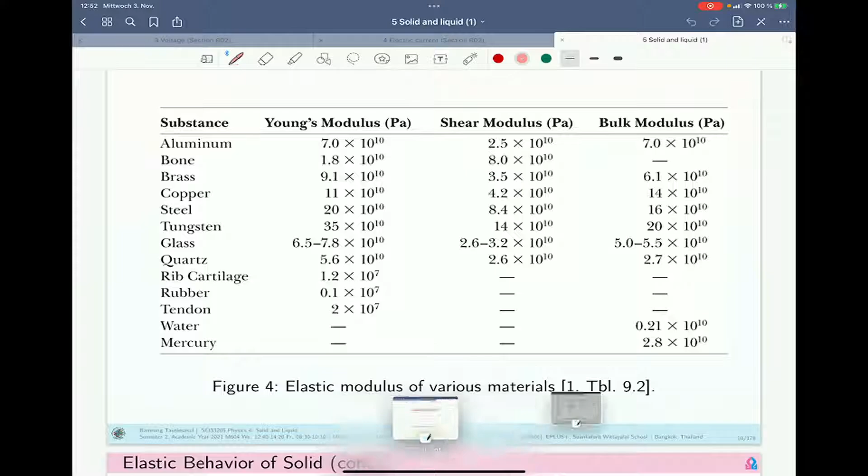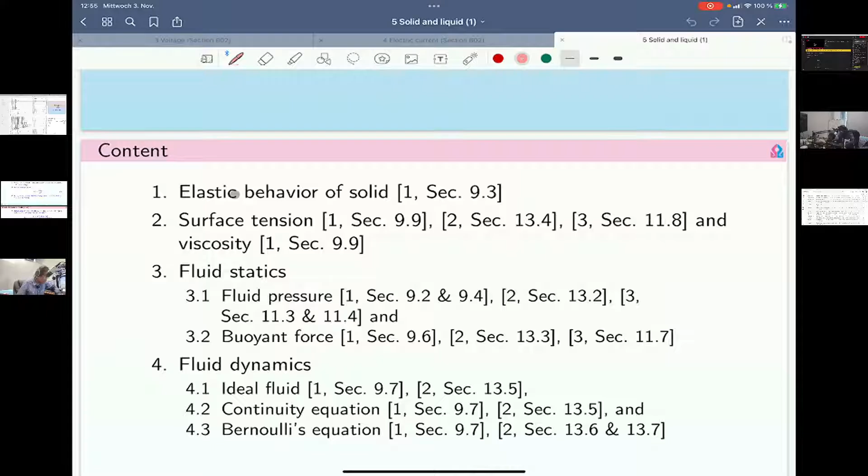The content in this chapter is as follows. First, we will talk about the single title that we are going to cover about solid, that chapter is about solid and liquid, right?

I didn't tell you that in this semester we will have a lot of things to see. The 5th chapter is solid and liquid, and in the 6th chapter it is atomic physics, right?

Atomic physics. And the 7th chapter is nuclear physics and particle physics. Okay, the particle physics is quite new, I didn't hear about that during my age in high school or secondary school. So the first chapter this semester is solid and fluids.

The section that we are going to consider for solid is only this one, the first section, it's elastic behavior of solid. So we will talk about stress and strain in several aspects, for example in the longitudinal aspect, so we will talk about the length of that object, the length of the solid material.

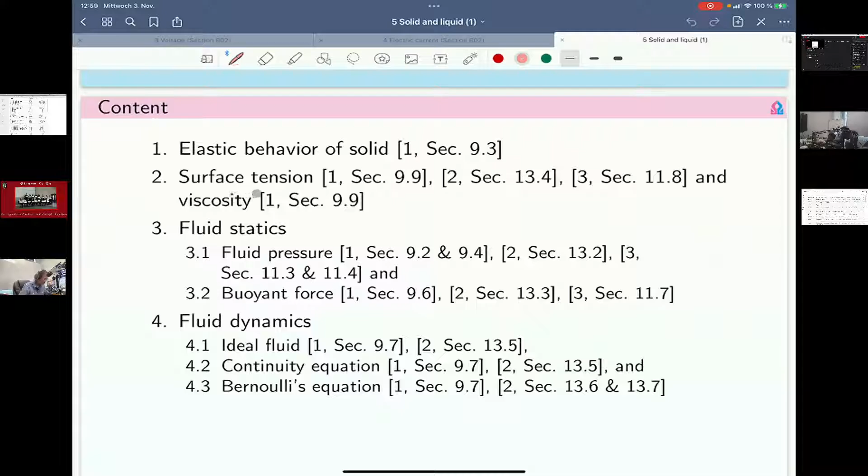In the second section, we will talk about the surface tension of the liquid, and viscosity too. Viscosity is mainly related to the behavior of oil and so on that is used in the automotive industry.

In this section, the last section will be movement of the fluid, and we will introduce this section with ideal fluid, the continuity equation, and Bernoulli's equation. This one is more general, and that's the whole thing in this chapter.

Let's start with the first topic, the first section: elastic behavior of solid.

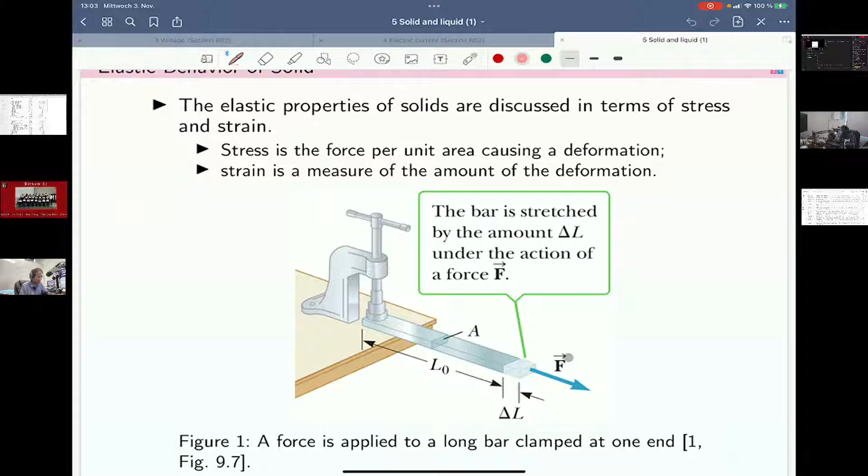Let's take a look at this. If you hold this device onto the plane of the table, it's fixed, and this is the device. If you rotate it, it's gonna keep this one fixed to the surface of the table. And you start with this one. If you try to pull or stretch this one out by the external force, which is denoted by the variable F with the arrow on top, that's the vector representation. The bar is stretched by you put the force, and if you take a look at the physical thing, you will see that this metal is gonna be stretched.

Its length is gonna be larger by the amount of delta L. For example, if you have the length starting at the beginning, L0, and if you put the force, you find that the length of this object increases by the amount of delta L. Let's say that the cross-sectional area of this cubic shape of this metal or steel is variable A. We will observe two terms: stress, which is the ratio between the magnitude of the force per the area A, and strain, which is the ratio between the stretched length, delta L, divided by L0, the initial length.

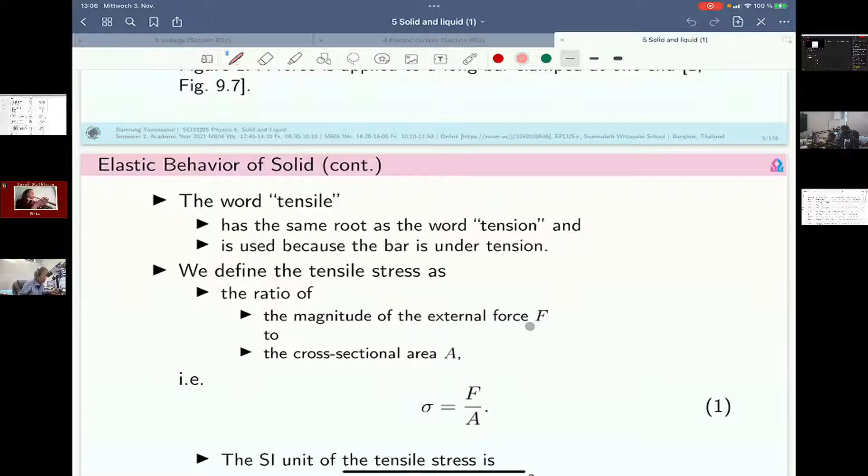We define the tensile stress as the ratio of the magnitude of the external force F vector, but we say it's F without vector, that's the magnitude, to the cross-sectional area A. The absolute value of this is the magnitude, which is denoted by the plain F, without any arrow on top.

Let's talk, because we are in physics, about the unit. The most common unit that we use, formally, is the SI system, System International. Because F has the unit of the Newton, and the area is square meter, it's going to be Newton per square meter. That's the word in the SI system, but we usually use a shorter name, in honor of Pascal, so we say Pascal, using the abbreviation Pa, capital P and small a. It's the same as the pressure for the gas.

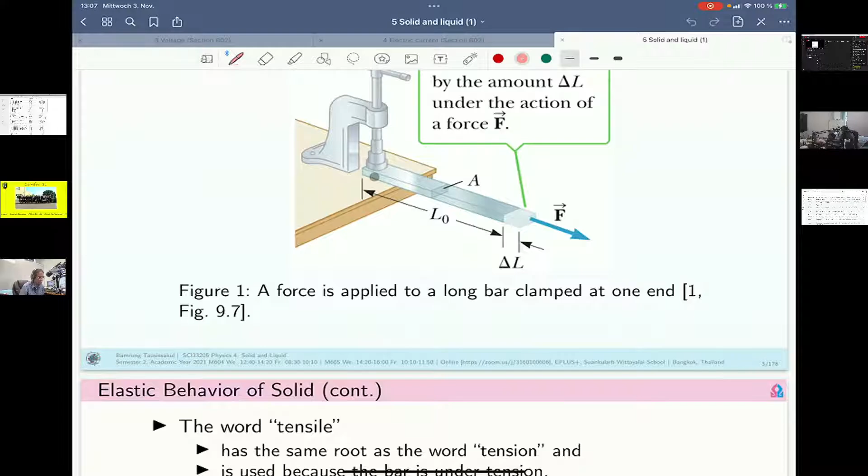So simply speaking, stress has the same unit as pressure, and we would say tensile stress because it's under the extension or tension, in the longitudinal dimension. We will have two aspects later: shear movement and bulk movement, which is the volume reduction, we will talk about that later. But in several books, they have provided the value of strain or Young's modulus for those three kinds of strain.

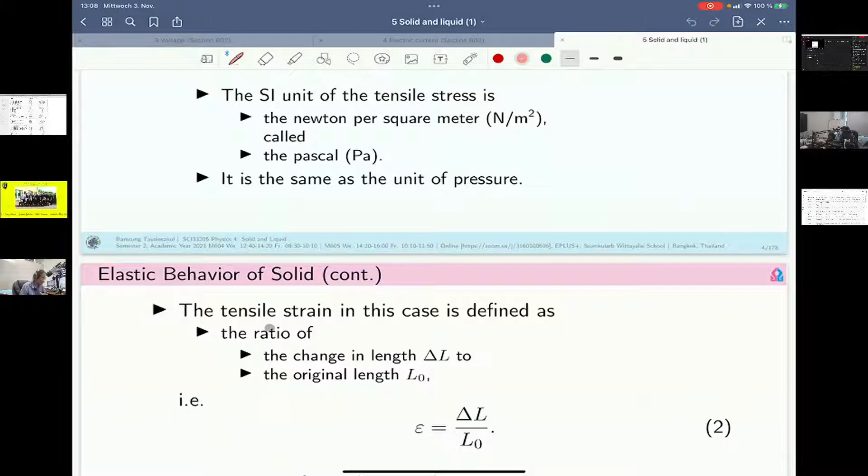After we discuss the unit of stress, we will see the next thing, which is the tensile strain. Tensile means extension or something like that, longitudinal dimension, and strain is the ratio between the extended length, the change in length, delta L, divided by the original length L0.

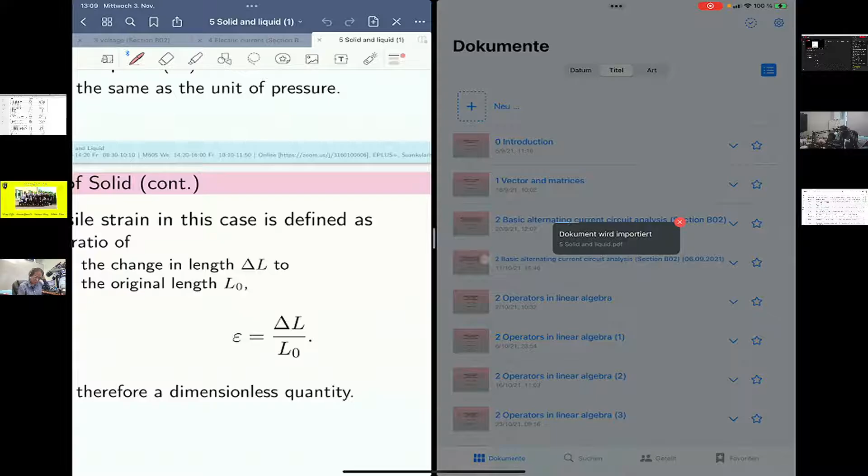The epsilon, right? They use the Greek alphabet. Epsilon comes from the word error. Similarly to error in English, they use the Greek letter E.

Epsilon is the ratio between delta L by L0, the original length, the initial length. The unit of delta L is, in SI system, meter, and the unit of L0 is also meter. So meter by meter is gonna vanish, right? There will be no unit at all for this ratio, and therefore we would have no dimension for the tensile strain.

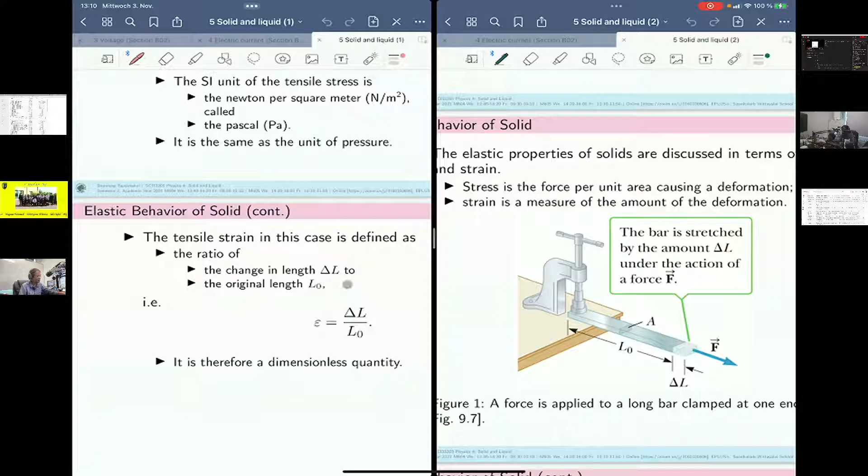This one has no unit. We have discussed about the stress. Sigma is F by A, similar to pressure. And the next thing is the strain, epsilon, delta L by L0. The third, before we go to the third quantity...

Let's take a look at the real measurement that some scientists or engineers have found in nature. For example, stress versus strain. We represent the y-axis as the amount of stress, and the x-axis by the amount of strain.

This is the epsilon, this is sigma, and the unit is in mega, 10 to the power of 6. You can use this formula, the tensile strain, during this region. It's called elastic behavior. After that, you cannot use this formula.

Let's take a look at this. We increase the force, and the stress is gonna be larger, it's gonna increase. Once we increase the length, we would also get it longer. Once we increase the force, we are gonna have more length too, so the strain will increase.

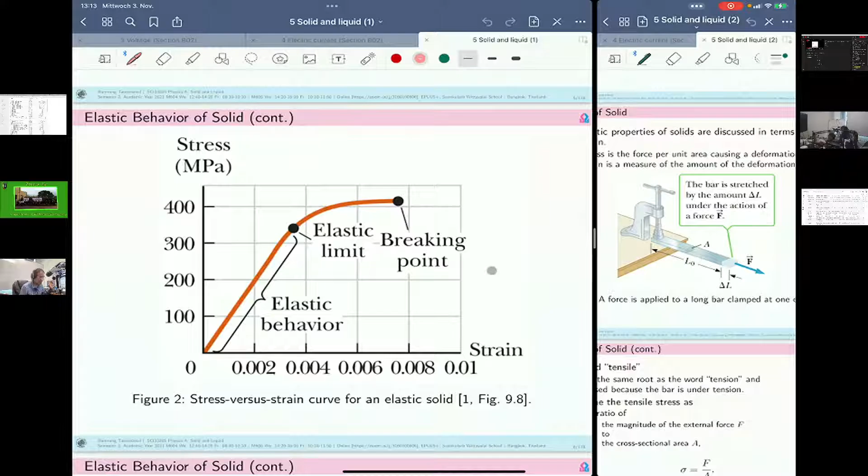There will be two pieces from this experiment, both gonna separate from each other, and the object is completely deformed. That's the curve known as stress and strain. You can see that the strain has no unit, because it's the ratio of the same quantities.

Length and length, there is no unit at all to the strain. And the increased length is not gonna be so much, you can see it's only a tiny amount, 0.01. That is the maximum. You cannot increase the length of metal or steel by 1 meter from 1 meter. The increased length of the steel will be very, very tiny.

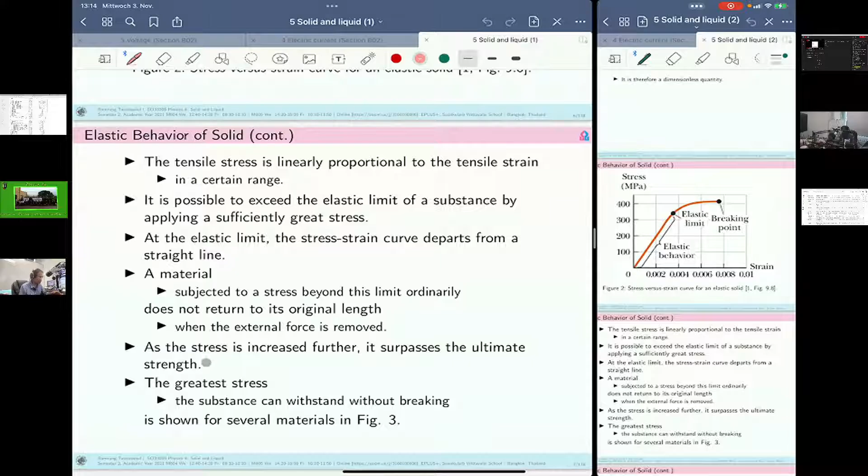That's the relationship between strain and stress, sigma and epsilon. Let's go further, the tensile strength. This is the explanation of this curve, and you can read it by your own. I have already explained it to you.

Let's move to the table that the scientists have provided to us. It's taken from book number 1. They have provided the strength. What is the meaning of strength? Strength is the maximum strength that the object or the solid is gonna break down at.

The object will have two pieces, they will separate from each other if you put the force or the stress beyond this value. So the strength is the maximum value of the stress at this point. If you project this point to the y axis, you're gonna have the so-called tensile strength.

In this experiment, you stretch the object out, you get the tensile strength. But if you compress the object, you're gonna have something which is called compressive strength. It's compression, if you put the force in the opposite direction. Let's talk about our setup, our experiment: we stretch this cubic steel out, and for iron we would have something like 170 million newtons per square meter, or megapascal.

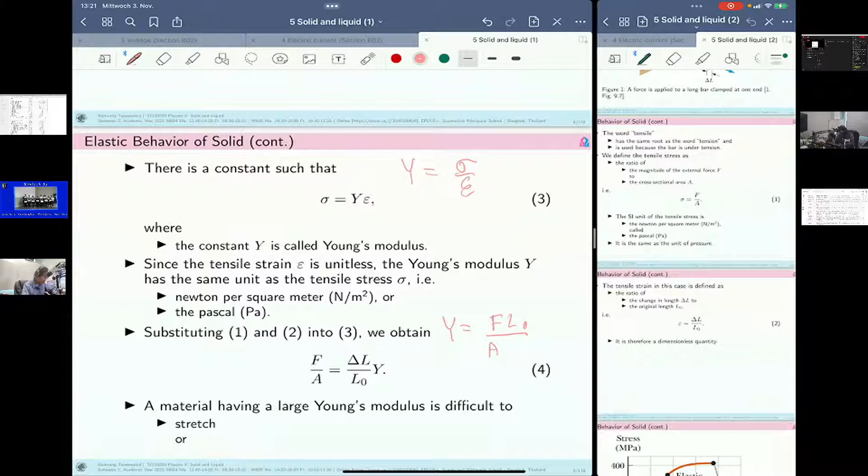And you will get this relation, or if you want to move it to the left-hand side, you would get Y as F and L0, and on the denominator, you would have A and delta L. That's another form of the Young's modulus.

A material, so what is the meaning in physical terms? If you have a material that has a larger value of Young's modulus, it means that it's difficult for you to stretch that material.

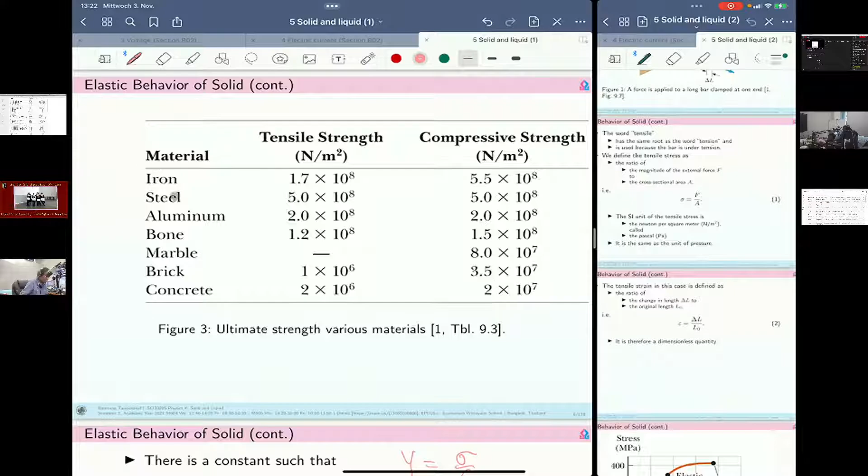And or if you consider the compression, for example, this one, steel. For steel, we find it more difficult to stretch steel than iron because it has... sorry, this is the strength value, let's take a look at this.

The steel and aluminum, for example. It's difficult to stretch the steel out more than the aluminum because it has a larger value of Young's modulus than the aluminum, for example. 20 is greater than 7 in this aspect.

Or compression too. The figure 4 is the table of modulus, Young's modulus, which is what we consider here in this setup. We pull the cubic piece of metal, and we get the additional length delta L, and it has cross-sectional area A. That's the setup in Young's modulus.

And shear modulus is another aspect, we will talk about that later. And the bulk modulus is the last one, the last experiment, the last aspect for elastic behavior of solid in this chapter.

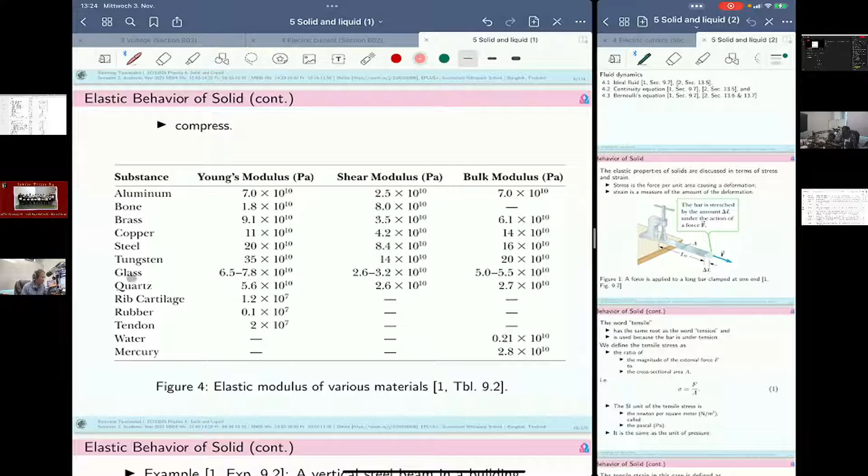And they have provided this table for several substances, for example, copper, steel, tungsten, glass, quartz. You can see that glass might not have an exact value, because it depends on the composite ratio of the glass. You have... right, let's take a look at the

first experiment, first example. You have 3 formulas. In physics, the formulas are quite important. Sigma is F by A, epsilon is delta L by L0, and we can use this formula only to this region, the elastic behavior, the linear behavior of stress and strain, and if you want to destroy that object, you have to consider this column, tensile strength.

And another formula is the Young's modulus. Y is sigma per epsilon, and in a detailed form, you have this one: Y is L0 times F divided by A and delta L. A vertical steel beam in a building supports a load of 6 times 10 to the power of 4...

You have an object here, right? This is the vertical steel beam, and there is an object with mass, and this mass is going to pull the beam down, downwards with the weight.

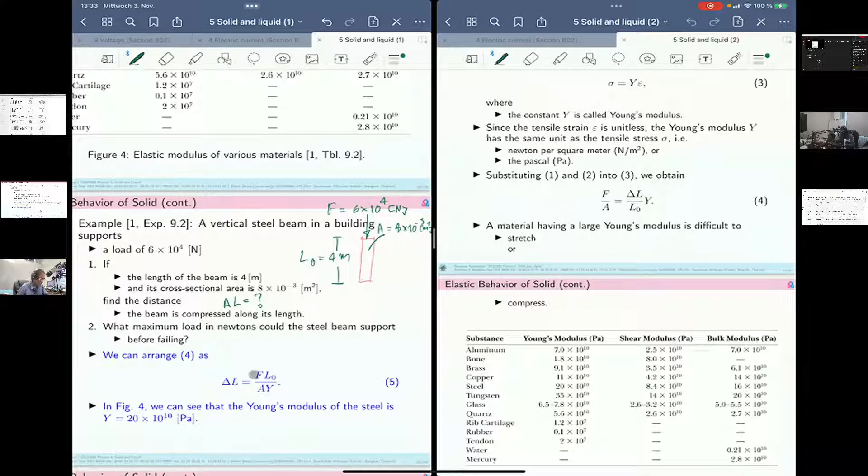So you will get F L0 here, all right, and A Y as the denominator. And after that, you substitute all what you know, right?

All quantities that you know that include F, the force, which is 6 times 10 with the power 4, and L0 is the initial length, right, which is 4 meter, and A is the cross-sectional area, 8 times 10 raised to negative 3, right.

0.008, right, square meter. You have to bring everything into SI unit, right. All these 4 quantities should be given in SI scale.

Otherwise, you cannot be compared with the value provided in this table, because they have provided Young's modulus in SI unit, okay, which is Pascal. And yeah, you would have cross-sectional area, but everything is provided already in SI scale, right.

The square meter here, right, and Y is Newton per square meter, or Pascal here, right.

And yeah, you can see that if you substitute it, F is 6 times 10 with the power 4, L0 is 4 meter, and A cross-sectional area is 8 times 10 raised to negative 3, right, it's very tiny. And the Young's modulus, I don't understand why they use this one.

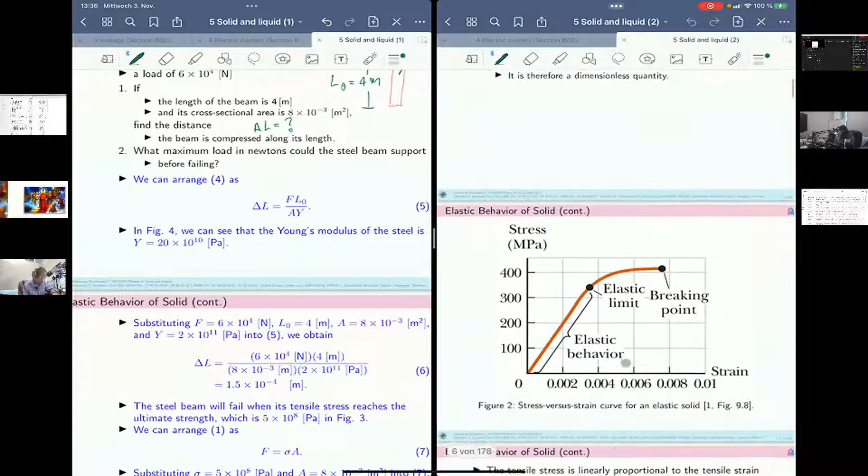Young's modulus, why? Two times 10 raised to 11. Why?

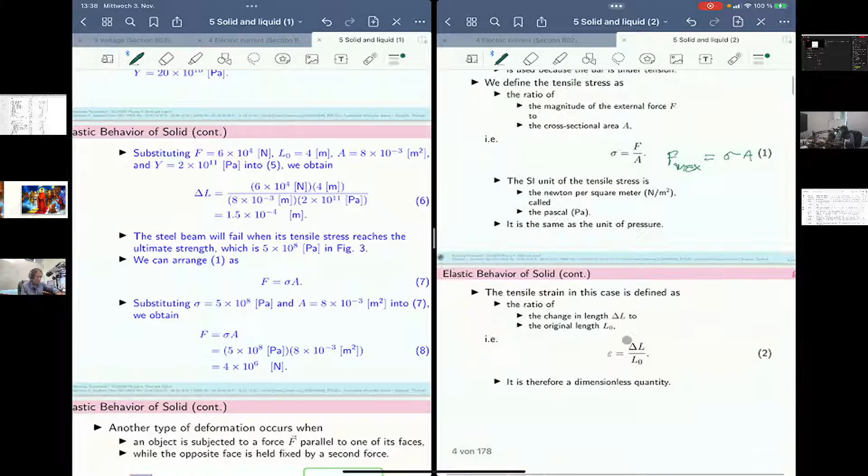The tensile stress formula, and you want to find F max. F max, which is tensile strength, is gonna be sigma times A. With this one, you just take a look at the table and look at the material you are considering. You are dealing with steel, right, it should be 5 times 10 raised to number 8.

500 megapascal, and you put 500 megapascal here into this formula for sigma. When do we finish? What time do I have to let you go? M604, 14:20, and 4 p.m., I have to finish for you, M604, okay.

F is sigma times A. You put this value, 5 times 10 raised to number 8 Pascal, into the portion of sigma, and you leave the value of the cross-sectional area that they provide here, 8 times 10 raised to the power negative 3, and you would get the value of the maximum force, which is 4 meganewton, or 4 million newton, and that's it for this example.

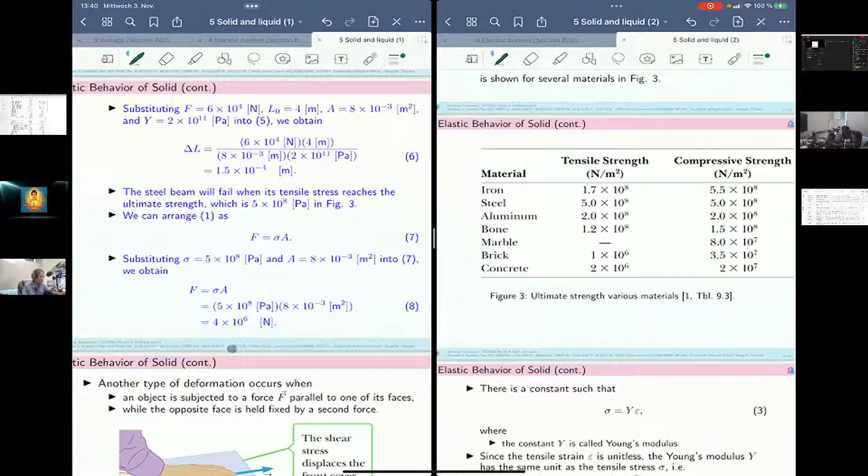Let's move to the next type of elastic behavior of solid, it's shearing experiment, shearing deformation. Another type of deformation occurs when an object is subjected to a force F parallel to one of its faces. Let's take a look at this, if you have a physics book, this is a thicker book.

You have several on the order of 1,000 pages here, and you can see that each page is not connected rigidly or firmly to each other. They can move from each other, but they stay on to each other by friction force. There will be many friction forces to each page in these books, and if you leave your hand and you try to put the front cover of this book from left to right, to the right direction.

Because there is a mass of this book exerted onto the surface of the table, there will be friction according to the surface of the back cover of this book, there will be the opposite force, the force in the opposite direction to this one. And yeah, we could not do that.

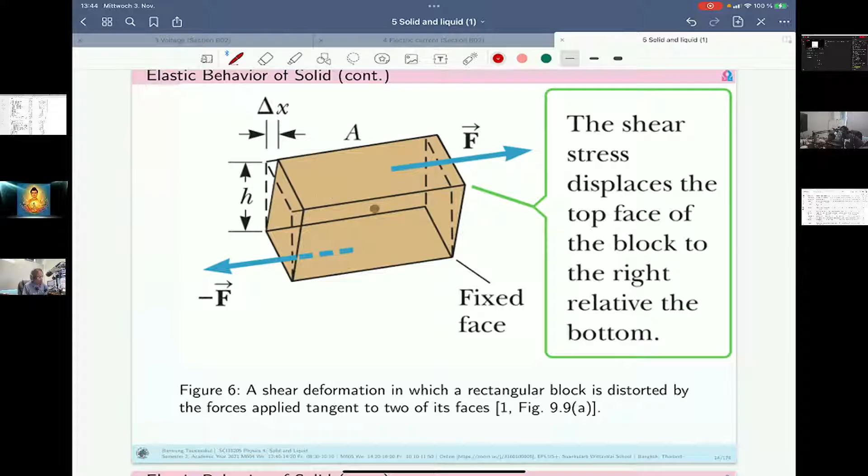This is a more detailed diagram. You have area on the table. It's not cross-sectional area, but it's parallel to the force, unlike this one. It's not the same.

In this setup, you have the cross-sectional area perpendicular to the force, but the area here is the area that touches the surface of the table, area on this side. At the starting point, we have the height of this object like this.

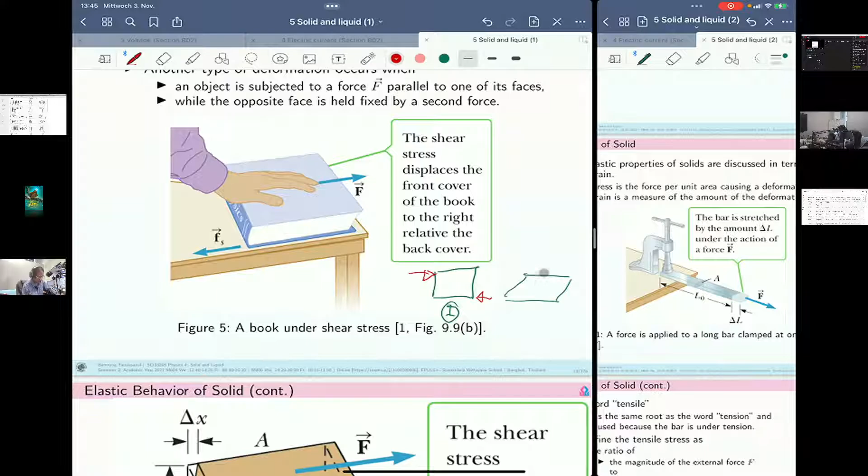After it is bent, there is an additional small value of variation, called delta x here. The shape has changed from this rectangle to a parallelogram, and the shear stress displaces the top face of the block to the right relative to the bottom.

Rectangular block. Now we will talk again about three terms: stress, strain, and modulus. In this setup, you pull out or stretch out the solid material. You have the so-called tensile stress, sigma, and correspondingly tensile strain, epsilon.

But in this setup, you try to shear, so it's called sigma shear. It's not simply sigma like this; it's sigma with subscript shear, which is used to differentiate it from the typical tensile stress. And also epsilon, the strain, should also have the subscript denoted by shear, because we are talking about this setup, this figure, this configuration.

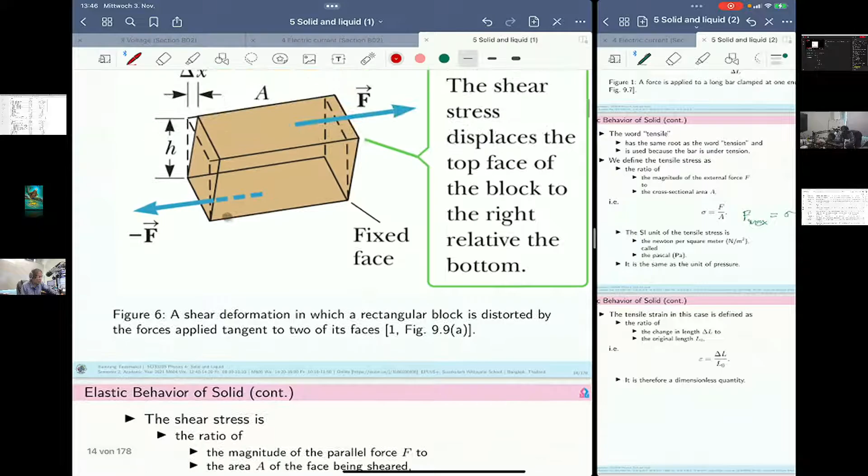It's again the same F by A formula, but F is the same type of force, while A is the face being sheared. It's the face lying down on top of the surface of the table, and then we have shear strain.

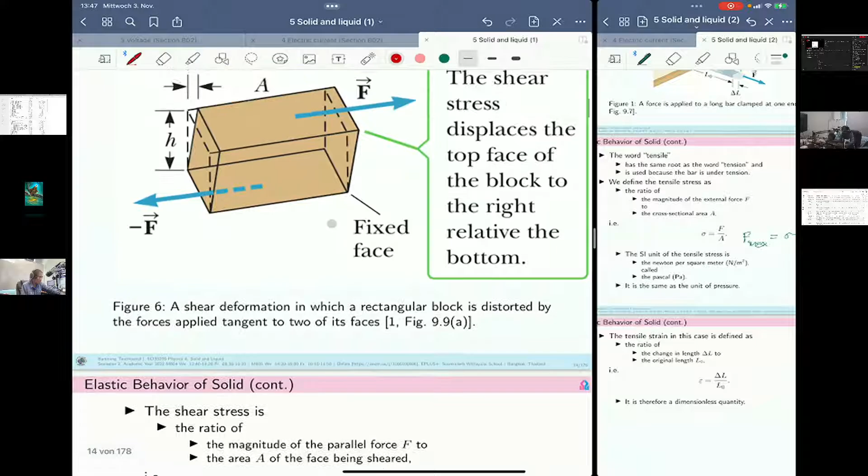It's quite similar to this one, but we don't talk about the additional length delta L at all. I'm not the person who defined this ratio - it's taken from the typical way that scientists have created it, and it's called the additional deformation, which in this figure is the additional small change to the side.

It's delta x, and the original height. So we have the ratio between the additional length delta x and the height of this rectangle. Delta x is the horizontal distance the sheared face moves, and h is the height of that object.

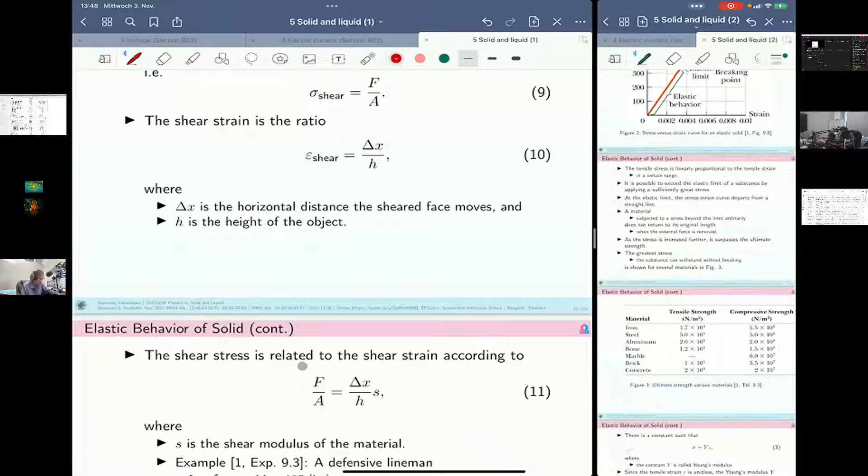Now, as in the tensile stress, we have Young's modulus, covered by Young. For us in the shearing situation, we would have something similar to that. You can see epsilon equal sigma by Y - that's the Young's modulus definition.

In this one, you would have the shear stress. S is sigma shear divided by epsilon shear. After that, you put this result, F by A, and substitute delta x by h into this position. You will get the shear stress.

But in another form, if you consider it like epsilon shear equal sigma shear equal epsilon shear times s - the small s represents shear modulus. This is shear modulus, s is the shear modulus of that material.

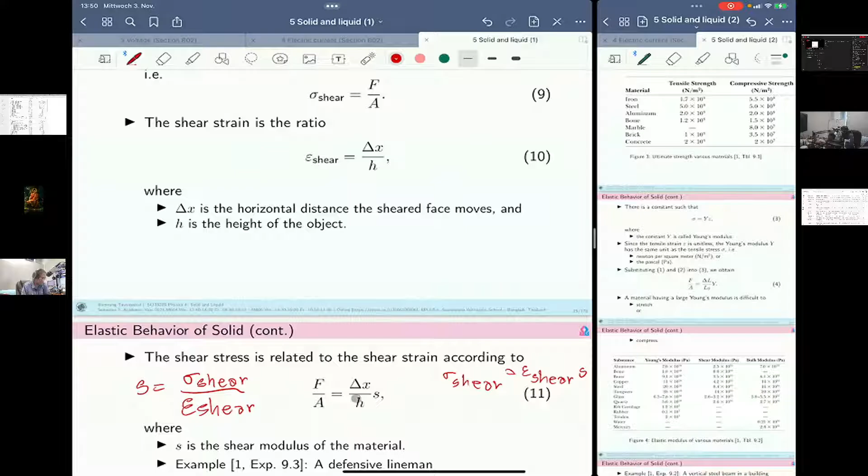Let's take a look at this setup: the shearing deformation, a defensive lineman. This is the guy - I don't know whether you watch American football or not, but if you do, you would know several terms in this problem quite well.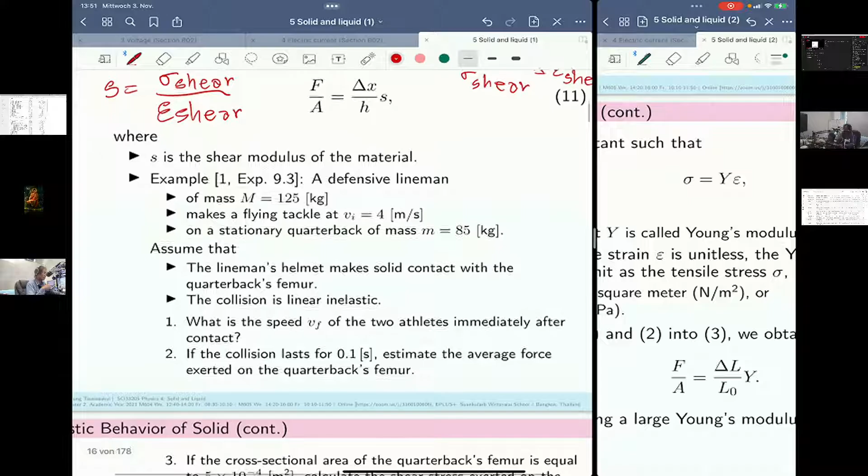Okay, if you are familiar with American football, I'm not sure if you watch it often, you would know several terms in American football.

In the United States, I think you may know better than me. They use the word football to represent American football, right? They use soccer to refer to the football played in Europe or in Asia. They use these two words to differentiate from each other, right?

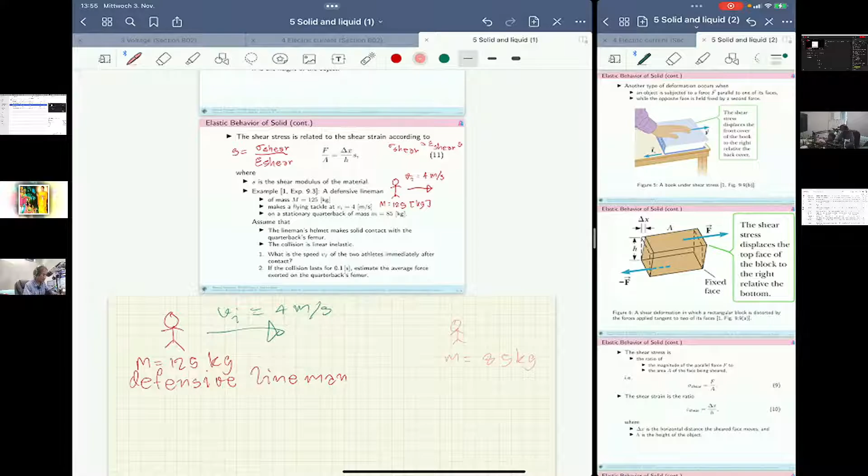The question is the following: the lineman's helmet - that's the first stage. Of course, this guy is going to hit this person, right? We call it the second situation. Because if you've ever watched American football, this guy should bend his body a little bit like this.

Hand and his head, right? And he hits the upper leg of this guy, of this quarterback. This is known as the stationary quarterback. He just stays idle, he has no movement or no speed at all, right?

And yeah, he hits. Of course you have two pieces of leg, right? And this one is called the femur, right? The upper part of your leg is called the femur. This guy hits the upper part of the leg of this person, the quarterback.

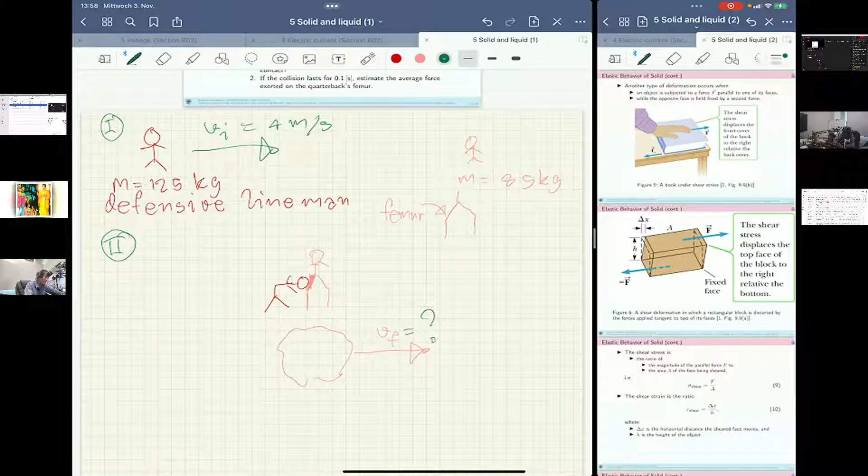The way to solve this is the following: you use P initial equal P final. Of course, in the initial state, we have only M times VI, because m times 0 - this guy at the first state has no movement, the speed is 0, he doesn't move at all, so the speed here is 0.

That's why we have 0 here. And in the final state, they combine into a single object like this, and the mass of this one is gonna be capital M plus small m. So we have M plus m times VF. In order to find VF, we're gonna move this term to the left hand side, so we end up with VF equal M VI, not times 0, because it's not significant to us, divided by M plus m.

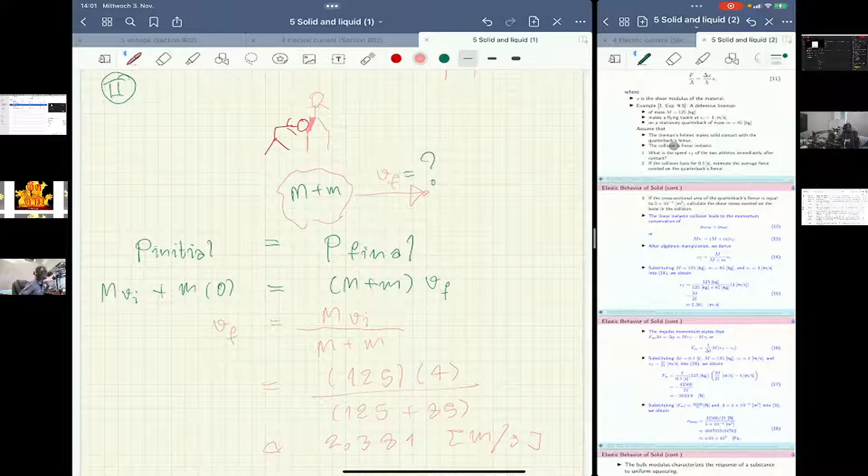It's m delta v, because the inelastic relation just transfers the momentum to the impulsive force. If you want to find the average force, you just use FAV equals m v.

In physics we have final state minus initial state. It's capital M, divided by delta t.

You substitute everything, 125, and VF, which is 2.381 minus 4, divided by the time, which is 0.1 second. You can see that the value will turn out to be negative because this one is less than this one.

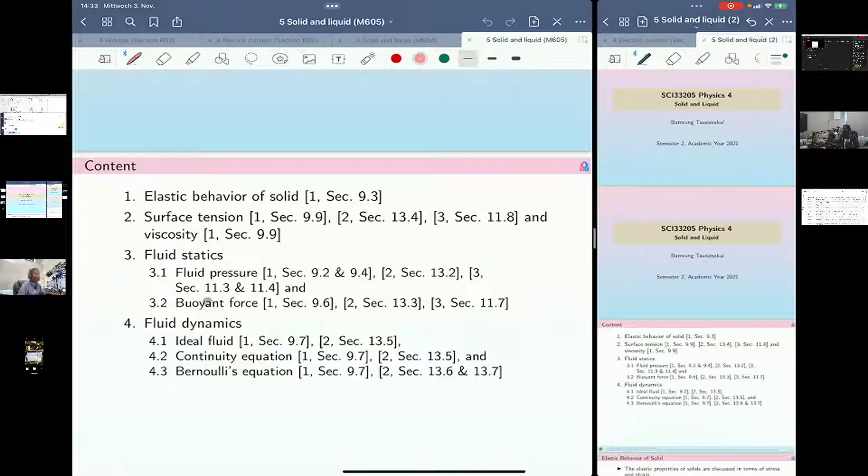Let's start with the first section, elastic behavior of solid. This is only the section that deals with solid - the remaining three sections will talk about fluid. The elastic property of solid will be discussed in two terms, two words - the first quantity is stress and strain.

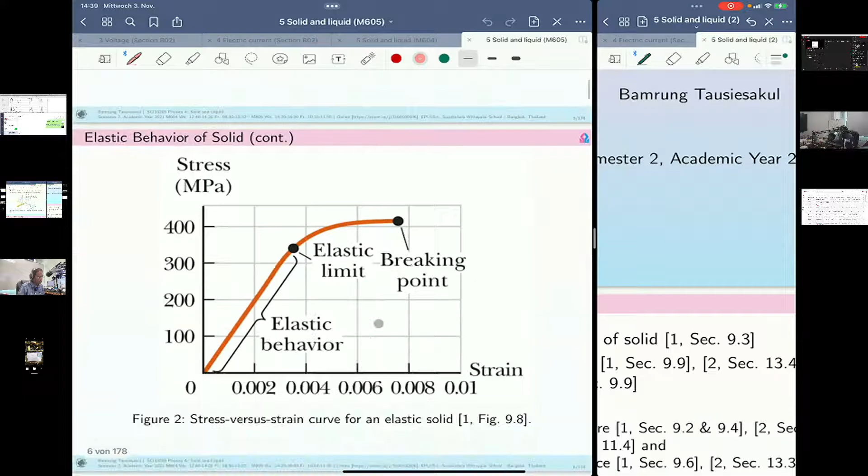There are three setups for studying the elastic behavior of solid. The first one is the tensile experiment - you pull out a beam of steel or metal. And the second one is that you consider the shear behavior.

You try to tear apart two surfaces like this - you have the upper surface and the lower surface, and you put the force on top of the front cover of this book, and there is a friction in the opposite direction. This object is gonna change its shape a little bit like this - that's the second kind of deformation for the solid.

The third one is the compression, but compression in every aspect - it's called bulk deformation. For example, if you have a solid and you put it into the liquid, and leave it in a very deep position, the force of the water is going to compress that object in every direction and strongly.

And of course, with the compression, the solid is going to have less volume. Less volume means that you have volume deformation. The size of this object is going to be smaller. That's the third kind of deformation for the solid.

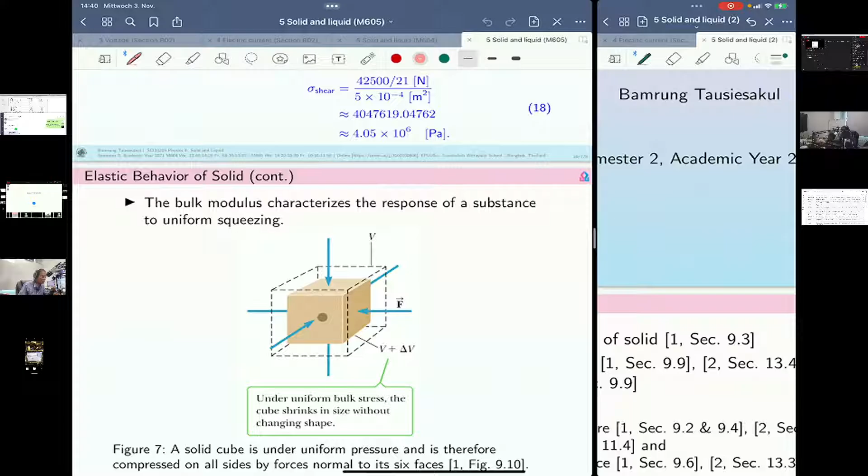We will see here three different kinds of deformation. The first one is the extension deformation, extending deformation, or the compressing deformation.

You have a device that is fixed to the surface of the table, and you rotate it to keep this bar fixed to the surface of the table, and at the initial state, the length of this bar is L0, whether centimeter or meter, any kind of unit. And you try to pull out this bar.

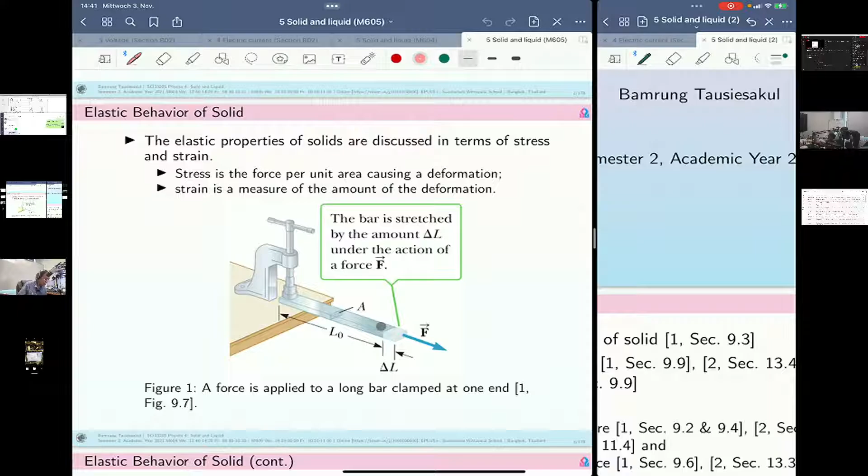It's a kind of metal, it's in solid form, and of course it's going to be stretched, right? The length of this bar is going to be longer, and after a certain time, you will see that the shape of this bar is increased by this amount. But we just only observe the additional length, and the additional length is denoted by delta L, whether it's centimeter or meter doesn't matter.

That's the tensile deformation. So let's get back to these two terms. Actually, there are three terms. The last one is going to be considered later.

The first term, stress, is the ratio between force per unit. It's like pressure. The tensile setup, tensile deformation will be something about the magnitude of the force here, divided by the cross-sectional area of the object that you pull it out. That's the stress, and the stress is denoted by this formula: sigma is F by A.

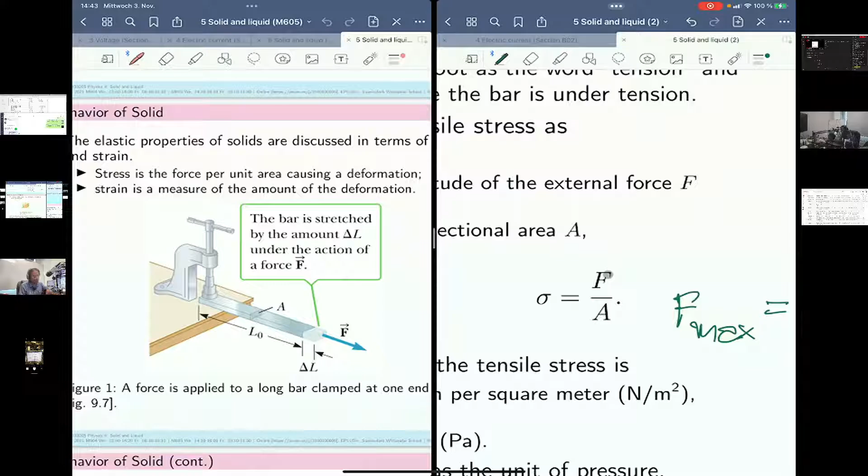Let's take a look at F. F is the force here, and A is the cross-sectional area. As you know, the force has the unit of Newton, as usual in physics. And A, the cross-sectional area, of course in the SI system we have square meter.

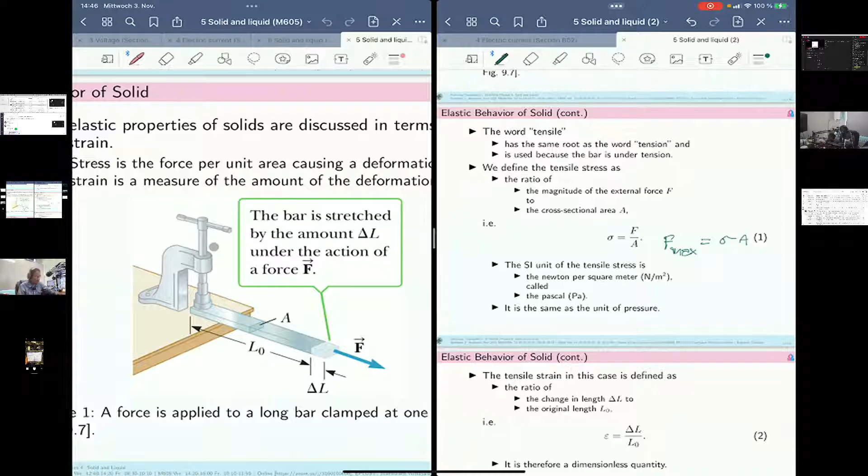With this experiment, there is another term, right? As you know, strain. Strain is another quantity that is going to be considered in this topic. Strain is defined as the additional length and the initial length L0. Delta L by L0 is the ratio.

This ratio is called tensile strain, and they use the letter epsilon. Why epsilon? Because epsilon looks like the letter E in English, and letter E would mean the error, because you put a force, and the shape of this solid bar has changed from the length of L0 to delta L.

So they just assume that the cross-sectional area is the same. So the volume change will be the ratio between delta L by L0, that's the same thing, and this is called strain.

Simply speaking, strain. If we make more analysis to the strain, you can see that at the numerator we have delta L, in the SI system we have meter as the unit of delta L, and the initial length of this bar is L0, which is also in meter. You can see that epsilon should have no unit at all, because meter by meter is going to cancel each other, and it's only one. So epsilon, or strain, or tensile strain for the full name, has no unit, or it's called a dimensionless quantity, a unitless quantity.

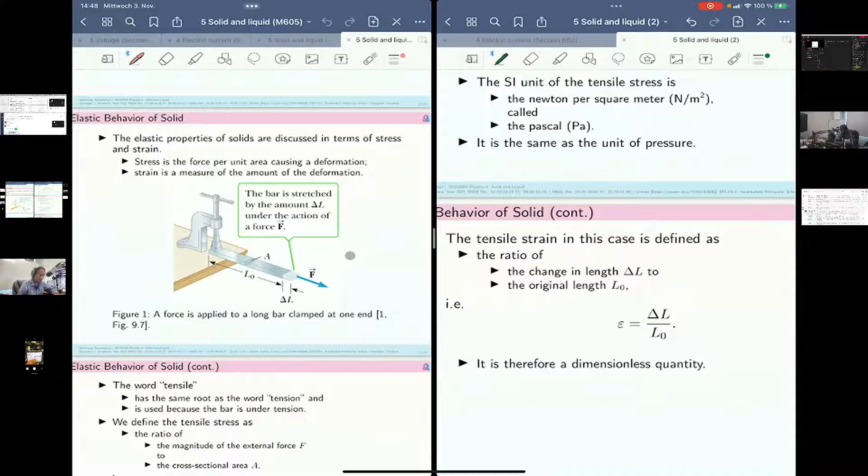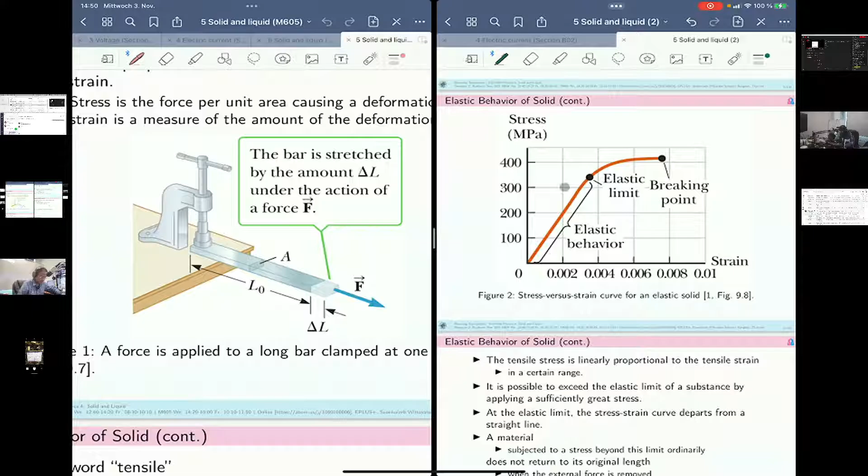The detail of this one is the following: the tensile stress is linearly proportional to the tensile strain in a certain range. This length is called the elastic behavior of solid, which is the topic of this section.

And it is possible to exceed the elastic limit of a substance by applying a sufficiently great stress. If you put more force, you will also have more stress, since stress and force are relatively dependent on each other.

Now the relationship between stress and strain is not going to be linear anymore. It's no longer linear, it's curvilinear, a curve dependence, not a linear dependence.

And at the elastic limit, the stress-strain curve departs from a straight line. Actually it should go further in the straight line direction, but it departs from the straight line, becoming a curved line, and at the elastic limit it departs from the straight line.

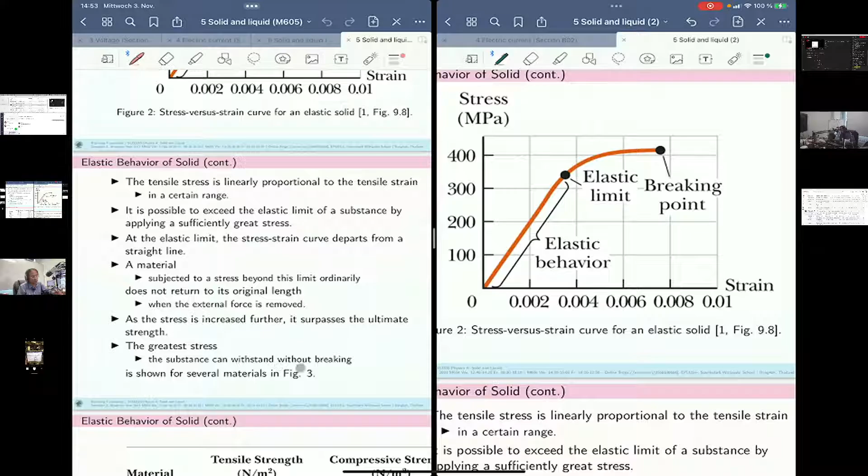The greatest stress the substance can withstand without breaking is shown for several materials in figure 3. So here the tensile strength for several materials is provided in this table. For iron, you have 1.7 times 10 to the 8 Newton per square meter. We have also values for steel, aluminum, bone - the solid piece inside our body - but we don't have it for marble. This is stuff for mechanical engineering.

We are talking about tensile strength, but you may observe that they have also provided compressive strength. The difference between tensile strength and compressive strength is the following: tensile strength is about letting the force pull out of the piece of solid, but for compressive strength, you turn the direction of the force into the object - the opposite direction of the force is exerted on this material. That's the compression to the steel or to the object.

This is the part for mechanical engineering - they have to consider iron, steel, aluminum, or even bone. But bone would be something for biomedical engineering. For civil engineering, they are going to look at materials like brick and concrete, which is on the order of million. The metal like iron, steel, or aluminum have more tensile strength than the material in civil engineering like brick and concrete.

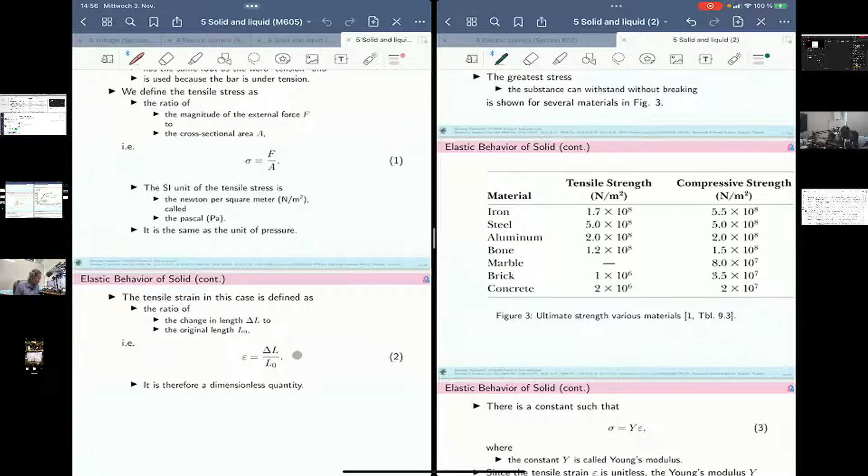Let's get further - you've got to know two terms already: tensile stress and tensile strain. The tensile stress has a unit of pressure, the tensile strain has no unit. And the third term is the modulus.

Let's get into the modulus. Modulus is defined using the letter Y, because we are talking about the Young modulus. Tensile modulus is known as Young's modulus because this is the surname of the person who considered this stuff first - that's the story - and Young's modulus is denoted by the letter Y.

Is the ratio between stress and strain. It's sigma per epsilon, right? And you would see that sigma has the unit of Newton per square meter or Pascal, and epsilon, which is...

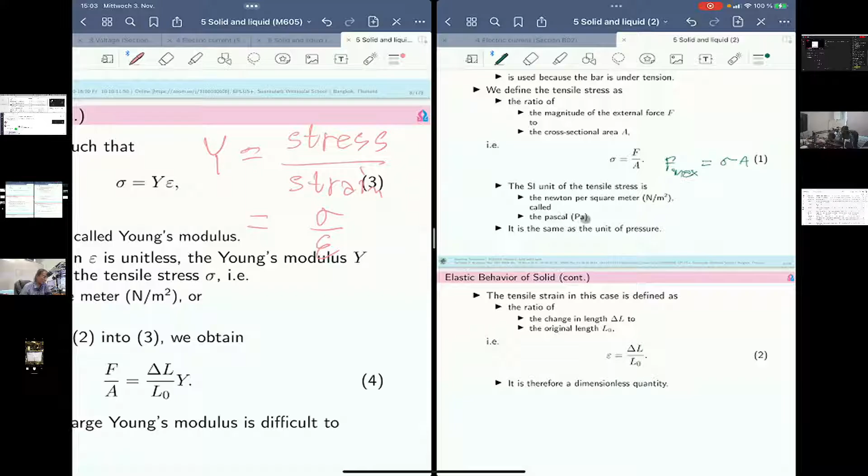Young's modulus is the ratio between stress and strain, right? It's sigma per epsilon. And you know that epsilon has no unit, it's a dimensionless quantity, and sigma is Newton per square meter. So Young's modulus would follow the same unit as the stress, which is sigma - also Newton per square meter, or Pascal, simply speaking. Pascal is PA, right?

It's the same unit as pressure, right? And if you write it in another form, stress equals the product between Young's modulus and the strain, right? And if you substitute the strain formula delta L by L0 into this equation, you're gonna end up with this relation.

It depends on which quantity the problem would like to know. For example, if they want to know the additional length, we have to move L0 to the left hand side as the numerator, and move Y, the modulus value, to the left hand side as the denominator. It depends on the question in each problem.

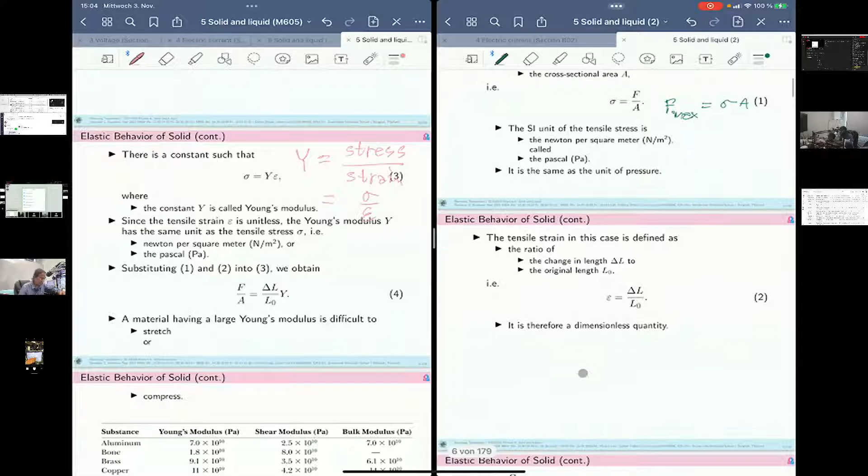The Young's modulus can be provided for both tensile stretching deformation and compressing deformation. What is the physical meaning of Young's modulus? If the object has a higher value of Young's modulus, it means we will be able to stretch or compress that object more difficultly than an object with a lower value of Young's modulus. The higher the Young's modulus, the more difficult it is to change the shape of that object. That's the conclusion you can infer from Young's modulus.

We consider only the tensile or stretching deformation, or compressing deformation. There are also two additional kinds of deformation. The second one is the shear deformation. The third one is the bulk deformation, or volume compressing deformation. We will talk about that later, but the first one is Young's modulus.

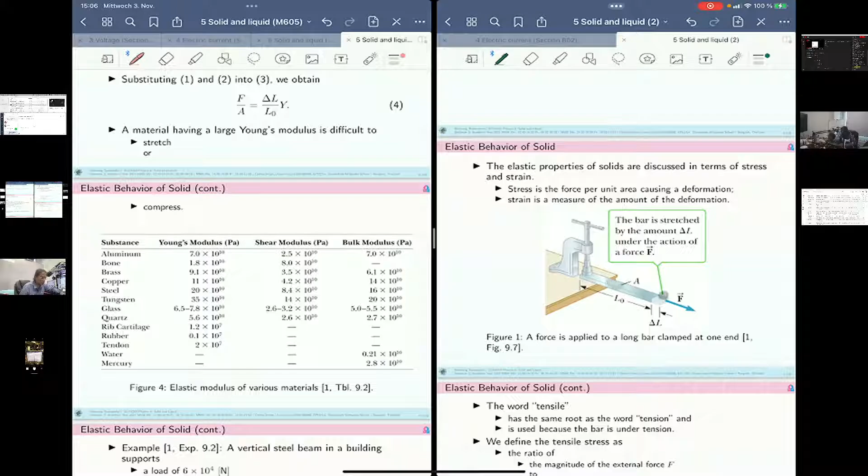They have provided this value based on stretching experiments for several materials - aluminum, bone, brass, copper, steel, tungsten, glass, quartz, and so on. But we don't have Young's modulus for water, because you cannot keep water and try to pull it, or mercury. We don't have Young's modulus for liquid - we are talking about elastic behavior of solid only.

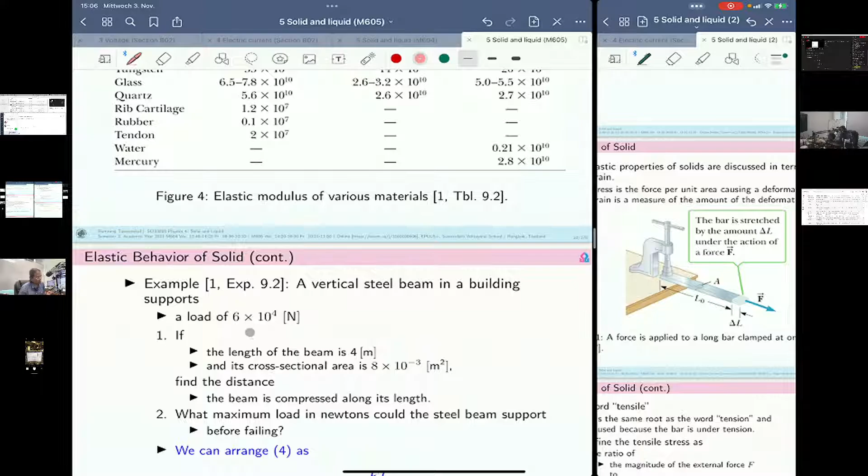Let's go further and consider practice with the first example: A vertical steel beam in a building supports a load of 6 times 10 raised to the 4.

Let's write down, set up. We have a steel beam like this, held on the ground, and there is some object that puts a force onto this beam by 6 times 10 to the power of 4 Newton - that's the force exerted on this beam. The length of the initial beam is 4 meters, so we follow that: 4 meters here, and its cross-sectional area is 8 times...

I'm not sure whether it's circle or any shape of this beam, because they didn't say rectangular or what. So A in this case is 8 times 10 raised to negative 3 meter square.

The question is, find the distance the beam is compressed along its length. Once you leave the beam like this, finally the beam is gonna be shorter, because it's compressed. You would see that the length here should be lower than that - it's called L0 minus delta L, because there is the compressing difference of the length here, it's delta L.

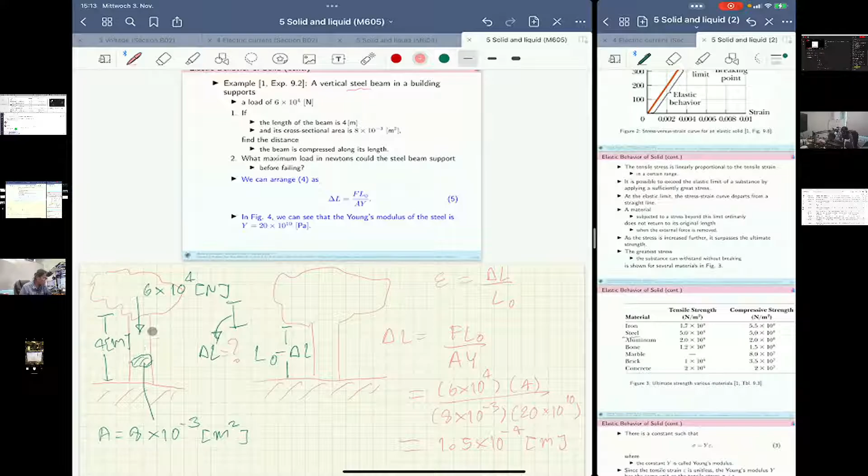We have to take a look at compressive strength, the second column, because this is compression—the force is directed into the object, not directed out of it. If it were directed out, we would use tensile strength. But here the force is pointed into the object, so it's compressive strength.

Take a look at steel, we get this value: 5 times 10 to the power of 8. Now what formula should we apply to this? It should be the stress formula again. Stress, sigma, is F max by A...

Actually it's F max by A, because this is the situation where we break the material, and this is the maximum force. So the maximum load will be F max equals sigma times A, where sigma here is the compressive strength in Newtons per square meter, and for steel is...

5 times 10 raised to 8, and the cross-sectional area is 8 times 10 raised to negative 3. Multiplying 5 and 8 gives 40, and with the powers combined you reduce it to the power of 6, giving 4 times 10 raised to the power of 6. That's the force, in Newtons.

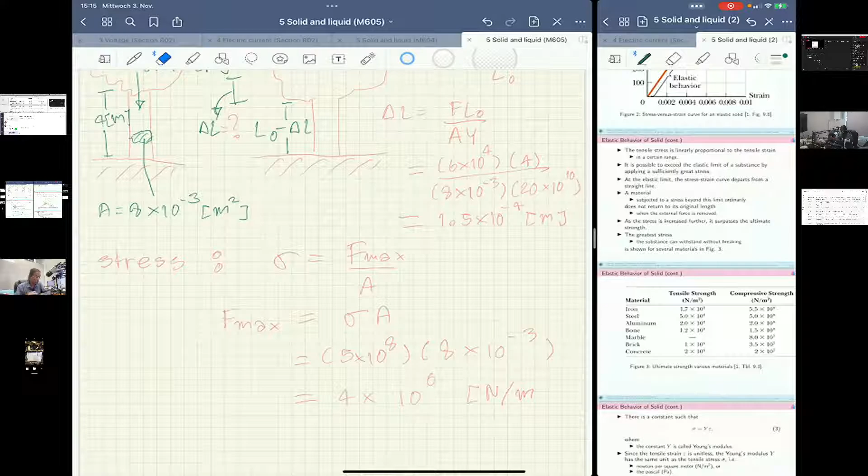It's Newton, right. Yeah, and that's the answer for this example.

We have already completed two answers to this problem. Next, we go to the second kind of deformation.

Another type of deformation occurs when an object is subjected to a force F parallel to one of its faces. You put the force in parallel to that object, and on the opposite face, or opposite side of this surface, it is held fixed by a second force.

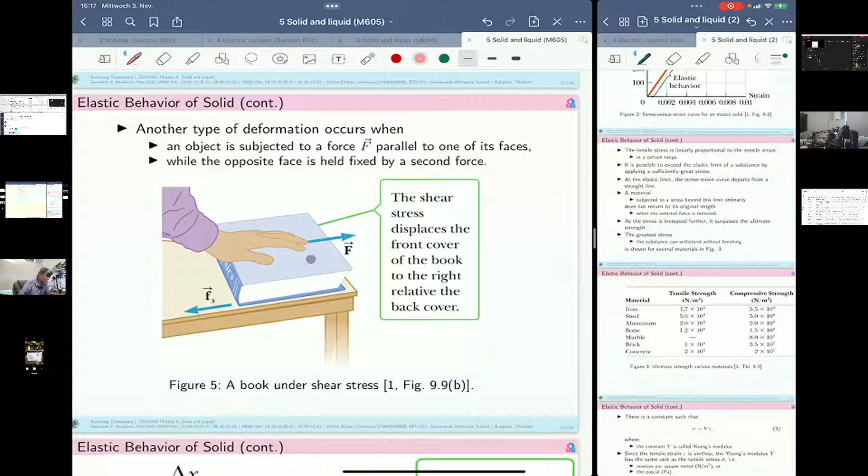Let's consider, for example, a very thick book with several pages, on the order of a thousand or several thousand pages, with a front cover and a rear cover. We leave the rear cover on the surface of the table, and apply a force in the same direction as the front cover. The book has its own mass or weight.

There will be friction, and the friction points in the opposite direction to our applied force. If the force is in one direction and the friction force is opposite, the shape of this rectangle will be deformed a little. The book will have a different shape from its original state—it has a height, and the change in shape is delta x, with a cross-sectional area of the book.

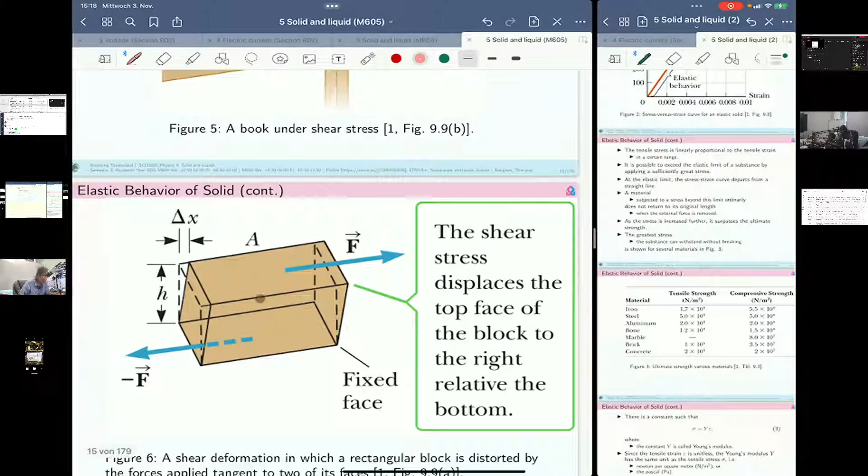Of course, as mentioned before, in the tensile deformation, in the stretching deformation, we have three words, right? The first word is the tensile stress sigma, and we have also the tensile strain epsilon, delta L by L0. But this one, we don't have delta L, we don't have L0 at all.

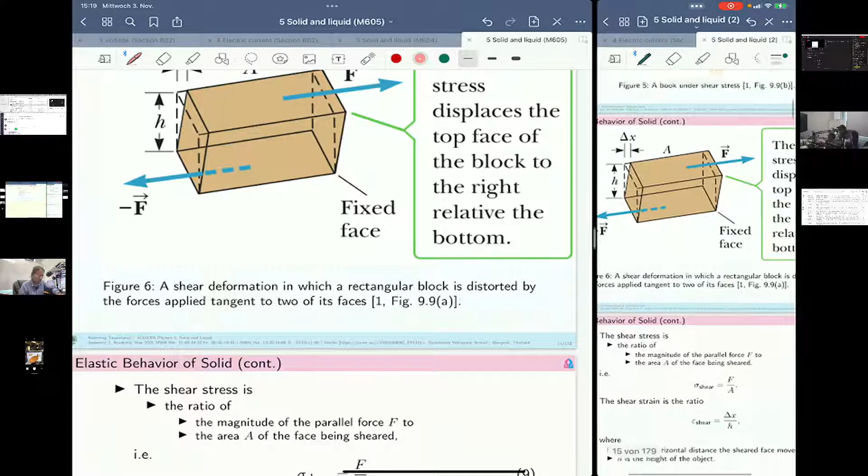The shear stress is gonna be the same as the tensile stress. It's F per A, the force per unit area. And epsilon, which is the ratio between deformation and the original object, is defined here as the difference distance delta x, divided by the height, the original height of this object. So we end up with sigma, epsilon shear is delta x by h, and A is the face being sheared, this area.

Okay, we have already tensile stress, tensile strain, and of course we have the Young's modulus, which is the ratio between stress and strain, tensile stress and tensile strain.

For shear deformation, we would have also the shear stress and the relationship between shear stress and shear strain, and that one is called S. They use S as shear modulus. Shear modulus is the same thing, it's sigma shear divided by epsilon shear.

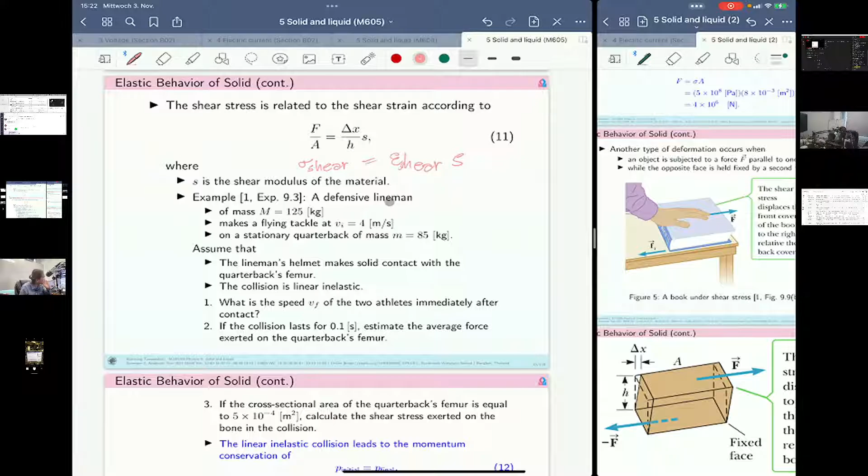Have you ever watched American football? I think most of you have ever watched it. In American football, we have... I don't know, I'm not a fan of American football. In the United States, they use football to represent American football. For us, we would say American football, and they use the word soccer to represent the typical football for European continent or in Asia. We say football as football, but in United States, they say soccer, because they want to differentiate it from American football. They use the word football for American football.

And here we have the problem related to American football. Defensive lineman, okay, it's a person here. That's the first state. We have a defensive lineman, this guy has the mass of 125 kilogram, and you have another person right there. This guy makes a flying tackle, which is a special word for American football.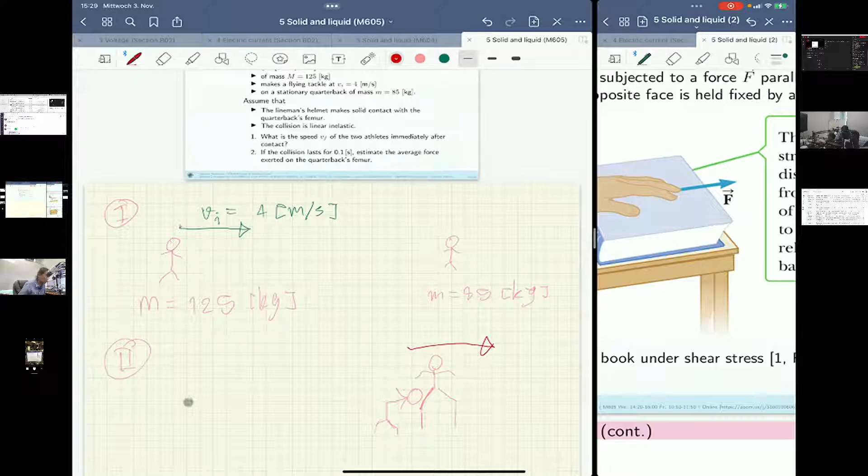These two people will move together, right? The linear inelastic collision means that both will move together. If they say elastic, it means this guy would get back to the opposite direction, but they will move together with this speed, the new speed, and it's called VF. And the question is, what is the value of VF in this scenario? Okay, the first state, the initial state, and the final state.

Okay, so inelastic collision means that we have P, which is momentum, right? P initial equals P final. Okay, the second state.

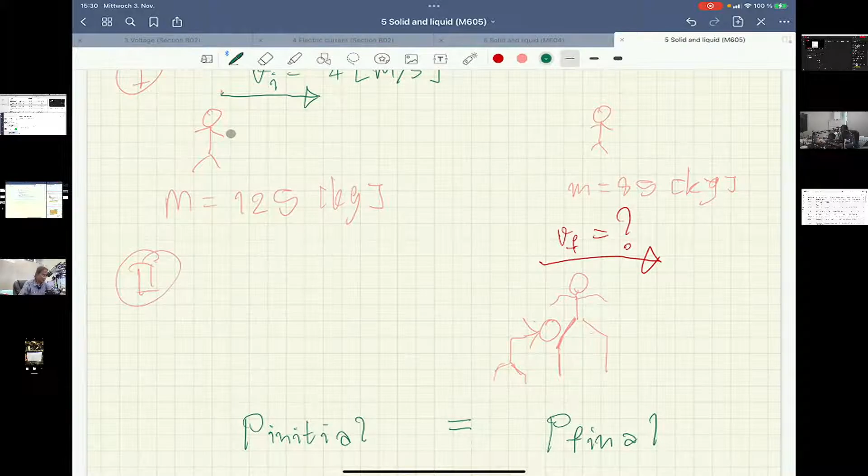And of course, if you take a look at the first state, the initial state, there will be only this guy who moves, right? And it's M times VI, M times VI plus small m, who didn't move at all. So the speed of the second person is going to be 0.

Okay, if you want to see the whole system momentum, the momentum in the whole system, we can have something like this, P initial, and after that, these two people could be considered as a single object.

Okay, they're gonna be considered as a single object, and they will move together with the speed VF. So the mass in this scenario will be capital M plus small m times VF, the final velocity, which is what we would like to know.

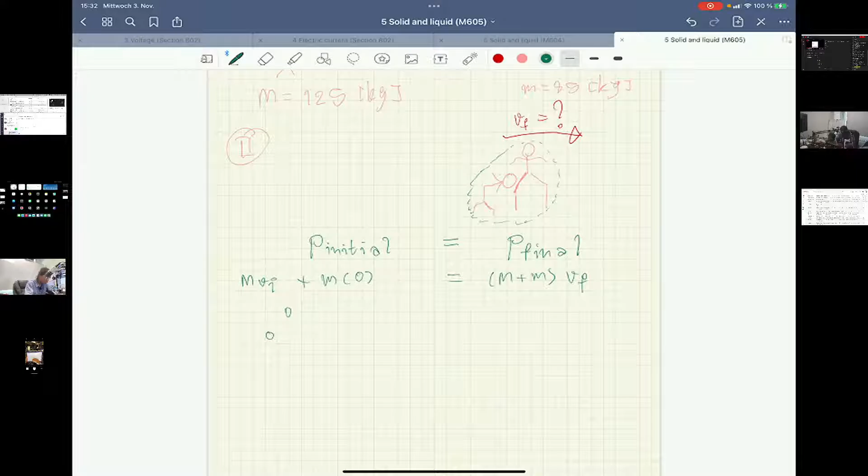And because our target is to get the value of VF, we are going to move the unrelated stuff, which is capital M plus small m, to the left hand side. So therefore, the final velocity will be VF, which is equal to M VI divided by capital M plus small m.

Now you're gonna need the value of all these three terms. The capital M is the mass of this guy, the defensive lineman. The small m is the mass of the quarterback. And the initial velocity is 4 meters per second. So right now we have already values for that: 125 and 4 meters per second, and 125 plus 85.

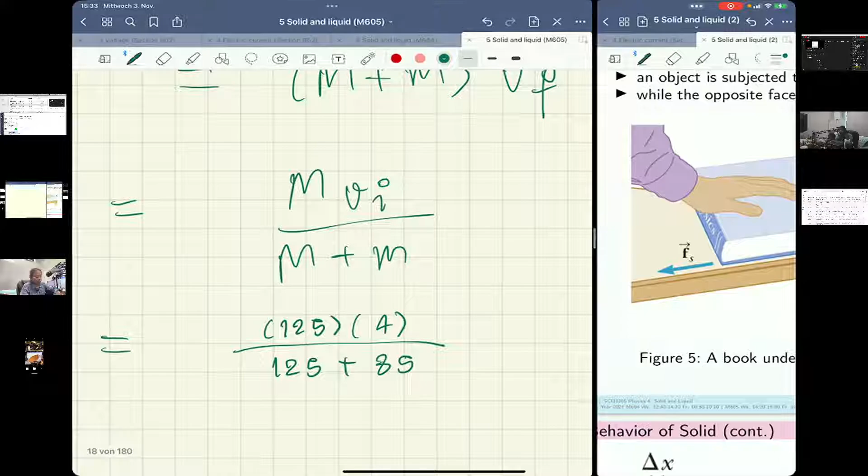And if you take a look at this, if you put this ratio into the calculator, you're gonna have the final velocity, which is approximately 2.381. Of course, the velocity is meter per second. All right, that's the value for VF.

But the second question is, if the collision lasts for 0.1 second, estimate the average force exerted on the quarterback's femur, because he just hit the upper part of his leg. There will be force. And the way to do it is the following.

You have to recall the formula from your former years: F delta T, impulse force or impulsive force, equals P, and P is mv. F delta T is delta P, and this one is delta mv. But the mass of the whole thing doesn't change, and the mass is the mass of the defensive lineman.

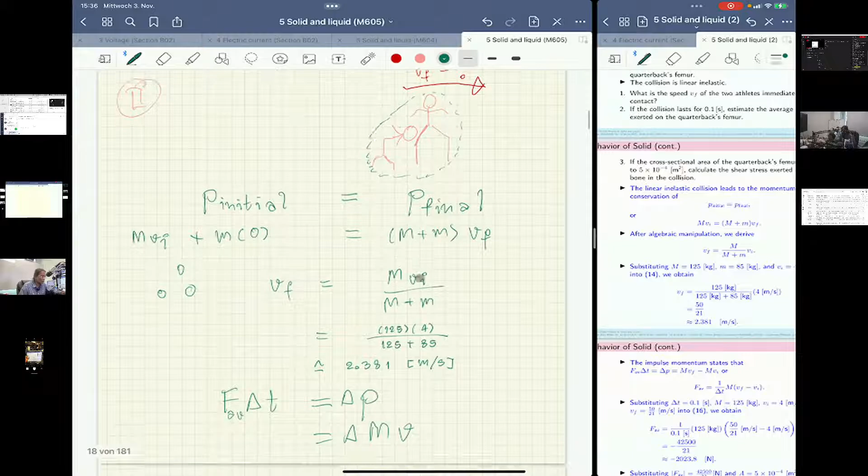In physics, when we talk about the difference between two states, we say VF final minus initial, VI, right? And what they want to know is F average, so this is called F AV. Okay, because the force should be high, it could increase, and after that it will decrease and remain zero.

So we talk about the average value, which is FAV. Because our target is FAV, we move delta T to the right hand side, so we end up with FAV equals M times VF minus VI. Please note that we use capital M because this guy, the defensive lineman with mass capital M, is the only single object that moves. This guy doesn't move, so we don't take into account the small m at all.

We have M delta V like that, and we move delta T to the right hand side, so it appears here, delta T. What they say is that delta T is 0.1 second. So let's substitute everything into this ratio.

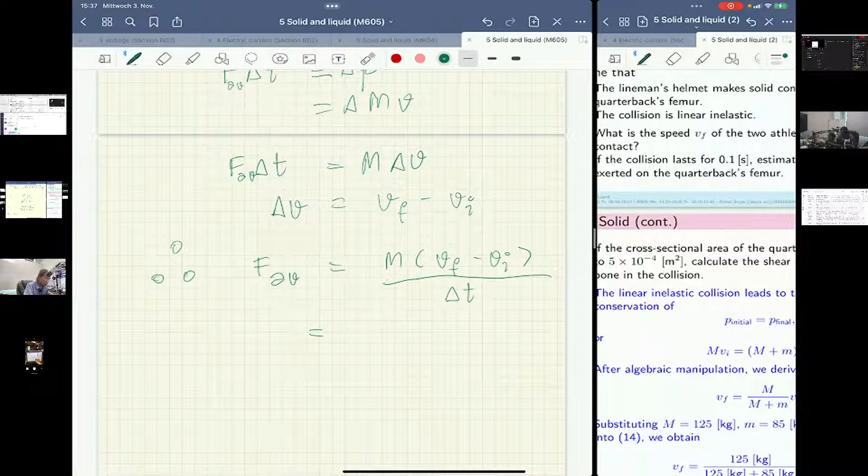Mass is 125, and final velocity is what we just got here, 2.381, minus 4, the initial velocity. The initial velocity is in this direction, and VF is also in this direction. So divided by 0.1 second.

0.1 second, and you put it into the calculator, you would get the result as negative 2023.8 Newton. And you may ask me, what is the reason why?

What could we get the meaning of the negative sign here? What does that mean? Well, we have to notice that we start every quantity from the left to the right, right? The direction of movement is from left to the right side. It means that once we get the negative value of FAV, it means the FAV is the force that takes place in this direction.

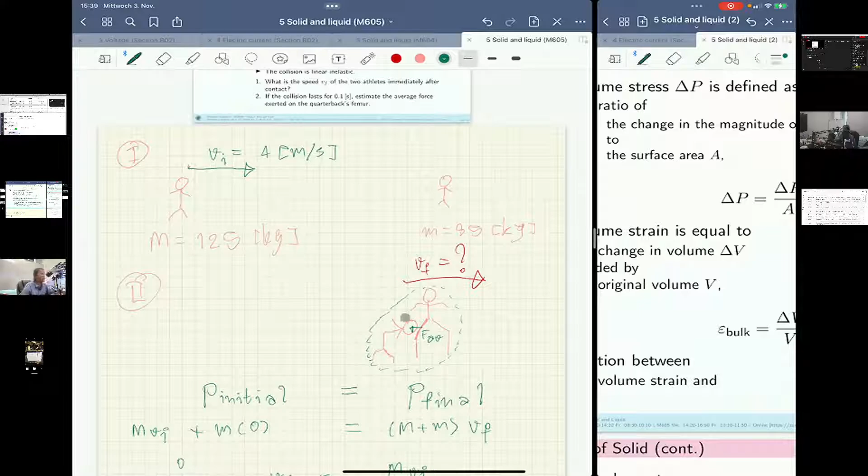FAV is from right to left, because the bone is going to hit the head or the helmet of the defensive lineman. This guy is in the opposite direction, so FAV will be pointed in this way. And that's the meaning of the negative value for FAV.

So let's get into the next question. They say that if the cross-sectional area of the quarterback's femur is equal to 5 times 10 to the negative 4 square meter, calculate the shear stress exerted on the bone in this collision. Assume that the femur, or the upper part of the leg of this quarterback, has the area at this location of 5 times 10 to the negative 4 square meter.

So what is the sigma shear in this scenario? In order to deliver the answer to this problem, we have to get back to the shear formula, which is F by A. So if we want to find shear stress, we simply use this formula.

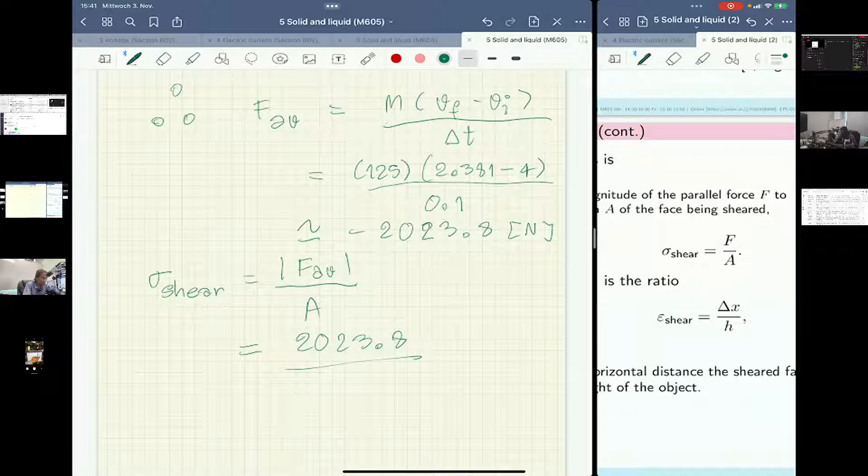Sigma shear is actually the absolute value of F divided by A, because we don't consider the negative minus sign at all. The stress is only a scalar quantity. And A, FAV is 2000, the absolute value 2023.8 divided by the cross-sectional area, which is 5 times 10 to the power of negative 4.

And you put it into the calculator, you will get the result as 4.05 times 10 to the power of positive 6. You can write it down in either Pascal or Newton per square meter. Both are valid, both are acceptable, but I prefer you to use the shorter one, Pascal, as it's the more general term.

And that's it for this problem.